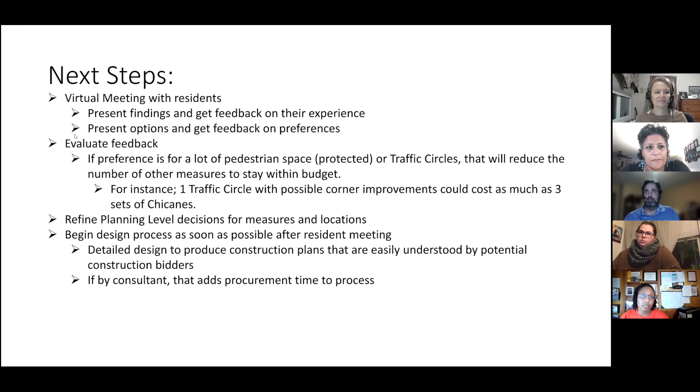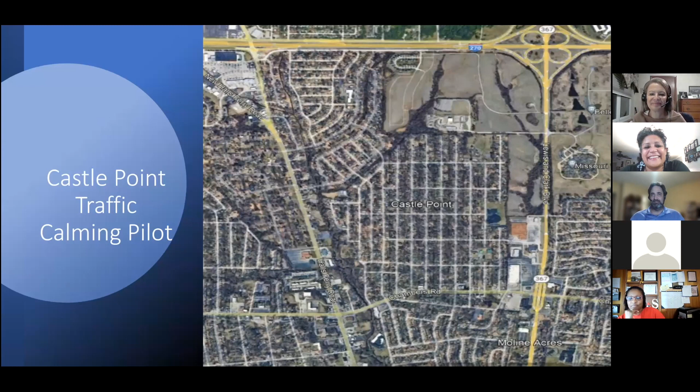All right, eh, seem to have skipped to the end. Yeah, okay, thank you for joining us. Okay, are we back where we left off here now, I think? Yeah, just go to the next.

That's just basic neighborhood information. We noticed you got the elementary school, nice county park, some pretty good amenities that would be good to be able to get to without having to use a car and worry about getting hit. Basically grid patterned streets, which by our standards is just very straight. You got a block, then an intersection, another block, another intersection. It's straight, not a lot of curves, which does not bode well for your problem. People can see forever, and when their eyes start to wander in the distance, they start going faster.

Then we noticed the problem. The north-south blocks seem to be fairly long compared to what most developers are building these days, they're 700 plus feet long. And the east-west blocks are pretty average, about 300 feet between intersections.

So what we did after we were contacted is we went out to gather some data, picked 15 locations throughout the subdivision to try and get a good feel. We got traffic volumes and speeds, which you will see the results of later.

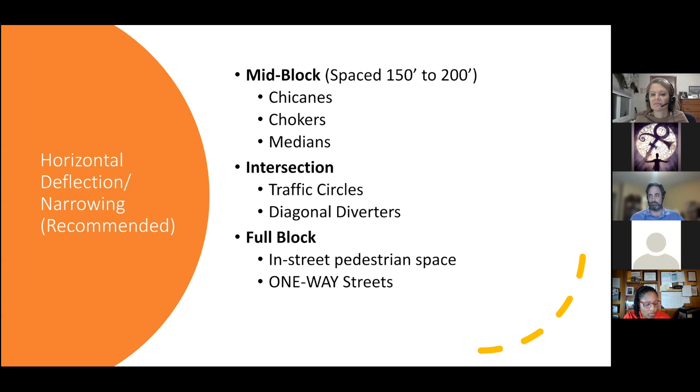A chicane, what we do is we put a bulb out on both sides of the street, separated a certain distance. That distance can vary depending on if you want two cars to be able to go through it at the same time, if they're going in opposite directions, or if you just want one car to be able to go through it, and if somebody else is coming they just have to wait.

These and chokers are pretty much meant to mimic parked cars. On our typical street, the street widths are pretty close to what we would build today. We build those streets so that there's room for parking on both sides and room for one car to go down the middle. So if there's a lot of cars parked on the street, that one car going down the middle is going to have to do something similar to what they'd have to do if we just built a bulb out to simulate that one car.

Of course, we would take into account people's driveways. We wouldn't block driveways, but there would be an on-street parking restriction in the vicinity of the bulb out.

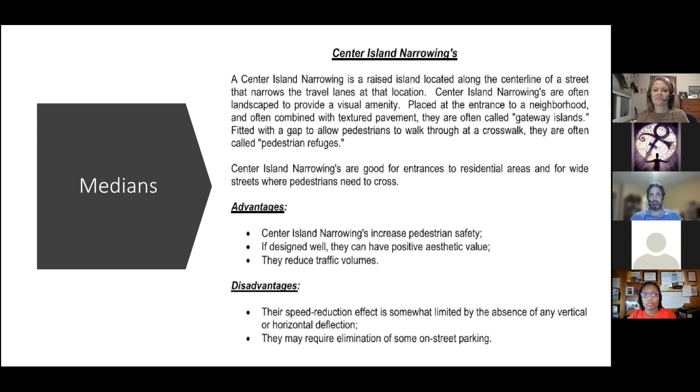So next, when we get to intersections, this is what I called the little miniature type roundabout. In a neighborhood, it's actually called a traffic circle. It's not near as big and cumbersome as a roundabout. What that does is it forces the person going straight to deviate from their straight path, which slows them down.

If the subdivision is interested, we will definitely explore it more, and we'll come up with a cost difference and see—if we do one of these and it forces us to fix all four corners to make it navigable, then it could mean as many as 2 or 3 of those previous installations we won't be able to do.

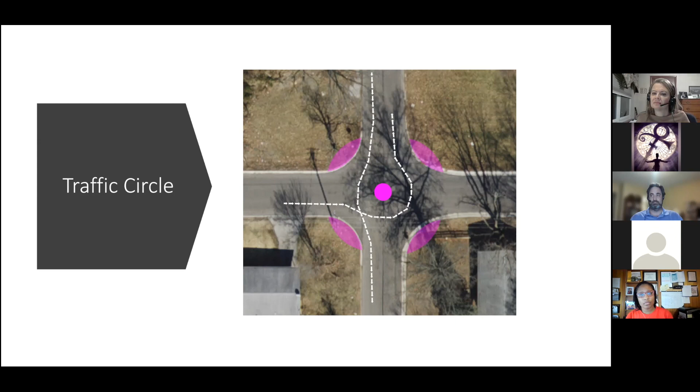They're good at moderating speeds. They would not be good for moderating speeds within that 700-foot long north-south block. So we would most likely still have to do something in between on those longer blocks.

They are very good for reducing accidents at intersections. The entire surface of the circle would be hard—there wouldn't be any landscaping or anything in the middle of it. So larger vehicles that can't make it around that circle would be able to drive over it if they had to make their turns.

Also at intersections, this—I don't know if it'd be called a nuclear option, but it is very restrictive—is called a diagonal diverter, where we just force people to turn and go on to the next block in one direction or the other to continue if they're going north-south multiple blocks. It is a good option if there are people running—

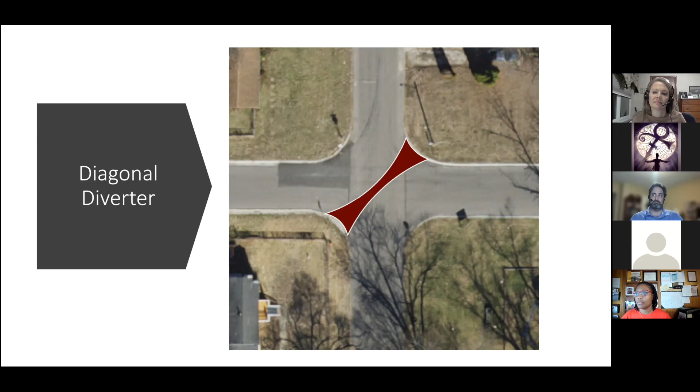It is an option, not one that I am suggesting, but if the subdivision is interested, just like the traffic circle, we'll keep exploring it. The costs are similar to the first 3 that we showed, because it can be built right at the intersection.

Advantages and disadvantages are pretty much what I already talked about—they're very restrictive. They could be bad for emergency services, depending on how they're getting there and what particular house they have to go to. They can be made mountable by a fire truck if they have to be, so that might be an option if it's something you want us to keep looking at.

As far as full block treatments, I mentioned that we could carve out 5 feet on one side of the road or the other for pedestrians. That can be done visually with a stripe, which probably would not make people feel very comfortable. It can be done physically with different treatments like parking blocks, or we call them French fries—they're really more like the official term, delineators—it's kind of a big plastic stick placed every 5 to 7 feet that just tells cars you're not supposed to be driving here.

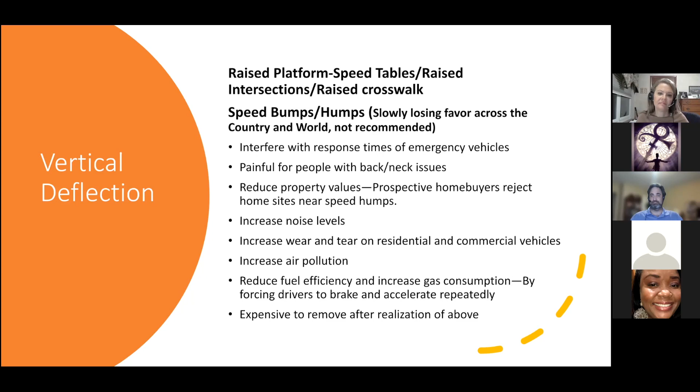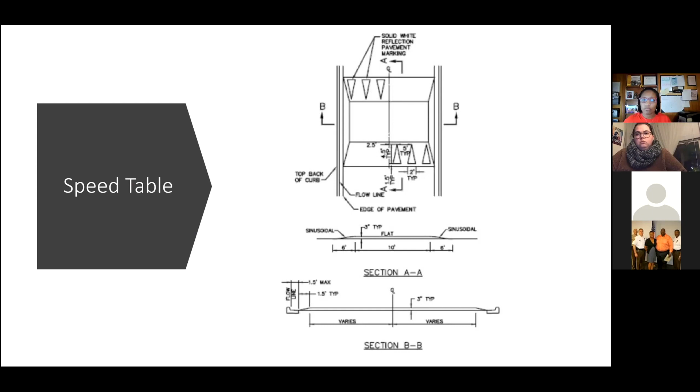They will reduce fuel efficiency and increase gas consumption. And if we were to go with something like this in this pilot project and everybody decided they didn't like them, then there's another expense to remove them. So it is something we will look at if you want to, but we are not recommending these vertical deflection measures. I did not draw them on your street as a typical, just because it's hard to really see something that is built up off the road on a plan view aerial. But this is just a typical surface of a speed table, where there's a slight ramp up on one side, a flat surface, and then a slight ramp down on the other side. It does slow people down, it's just they're not as popular as they used to be for those reasons I already said.

So they are smoother on the fire trucks, definitely smoother than speed bumps and speed humps, but fire trucks will still have to slow down. And like I mentioned, they tend to reduce property values just because they're kind of big and not real pretty, unless you spend the money to change the texture of the surface, like a stamped brick pattern or something along those lines. And spending money on enhancing those would take money away from doing anything in other places. So it's another balancing act, just like everything else. If we want to spend more money on a certain feature, that's just going to reduce the number of features we can do.

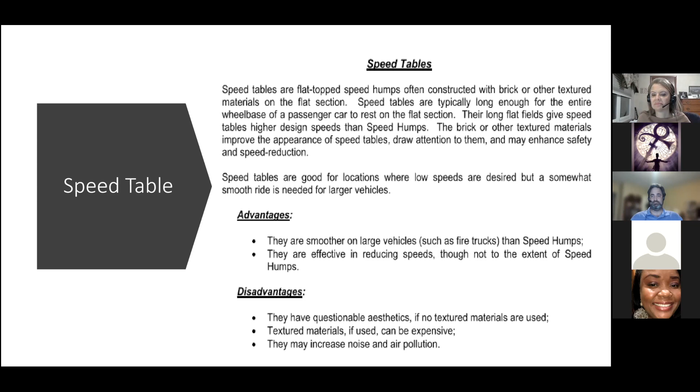So after looking at your neighborhood and all the possible tools, we have come up with what we think is a good plan. We wanted to get your opinion on making sure we knew where the problems were. We're still leaning towards horizontal deflection, building bulb-outs for chicanes, chokers, or putting a median down the middle of the road. The north-south blocks are definitely the problem that we saw, being 700 feet long.

The spacing of these installations is also critical. Different traffic calming guides suggest they be spaced no more than 200 feet apart. In that case, if you have a 700-foot long block, you're going to need really 3 sets to get the most benefit. So we would suggest spending money on 3 sets of those type treatments on the most problematic.

And I have no idea what that is opening. Oh, that's Adam. Sorry, that's me. Yeah, okay.

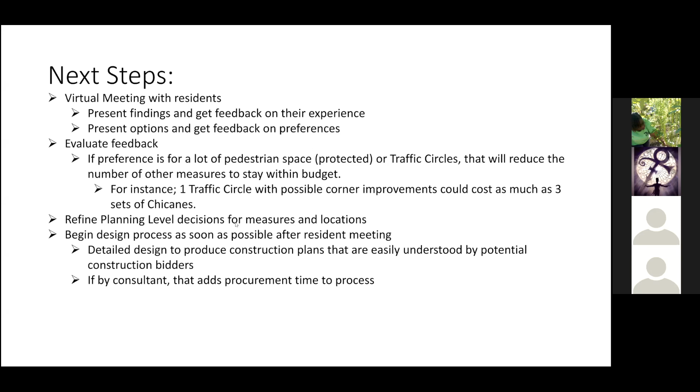I don't remember those tables right off the top of my head, but not all of what was in the red was north-south, but the majority was north-south. So, but yeah, we will definitely. Well, if that's the case, then Royal Drive, did you have that on there as a north and south street? Yes, okay, yeah, I see it now. So 35 miles per hour would have been the cutoff between it turning red from yellow. So Royal Drive and Baroness both were pretty far up there as far as what we considered a problem.

If I can interject, I apologize. My name is Lucretia Wilkes, and I have a home licensed daycare facility on Castle Drive. We've been there for 5 years, we're licensed for 24-hour care, so we have kids coming and going at all times of the day and night. We know we don't have sidewalks, and the speeding is atrocious. I talked to Councilwoman Rochelle Gray earlier in the year about it, after being concerned that one of our babies would be hit, and she told me that speed bumps were not going to be feasible because the streets were too wide. So I'm really excited about this project, but I wanted to know if there's any possible way we could have some type of, whatever we decide to do, special blocking or whatever, concentrated on the daycare facility on that end of Castle. That way we could probably slow down the speeding in front of the daycare in that area, if that's possible. My address is 10047 Castle Drive. Thank you.

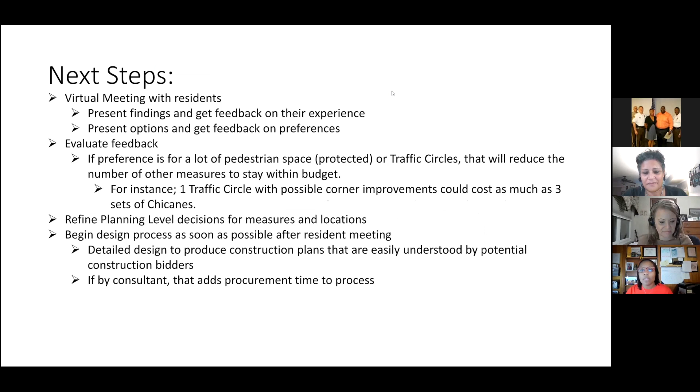I love you too. But I just truly appreciate the Castle Point residents who showed up today, because it shows that you really do care. Not that people who didn't show up don't care, because I know people have lives, but I truly appreciate you all taking the time to attend this meeting. I know it has been a long time coming, you all. We know there is a lot that your neighborhood needs. But as Mr. Glenn stated in one of his slides, which I love, is that we need community buy-in. We can only do so much in our capacities, but you all live there. And we need you all to be strong advocates for yourself and for your neighbors and for your neighborhood and for your community. So as much as you all can show up to these meetings, as much as you all can get engaged and get involved as time will allow, we encourage you to do that as much as possible.

Reach out to us, get on our nerves. There are some people who will reach out to us every single day. I get phone calls from some people every single day, and that's okay, because it shows that you care. So if you have to get on our nerves to get stuff done, do that.

Okay, so that's my final words. I don't have anything else. I love each and every one of you, and I will continue to work to the best of my ability to help make life better for the residents of North County and for the residents of St. Louis County.